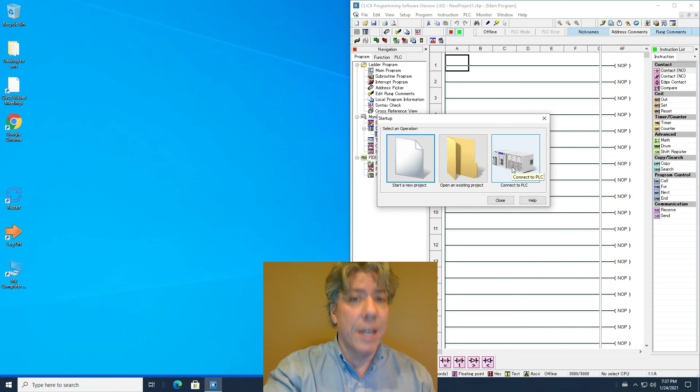Now, in a lot of the demonstration videos, you'll see people start a new project and then select the PLC they're working with. If you just connect to the PLC, then it will detect what kind it is. Now, there's actually a couple of different PLCs. There will be PLCs that you are working with, and those are connected via USB. You'll see a little cable that runs from the PLC, and there's a little blue box that converts it from serial to USB. USB is also technically serial, but to a standard serial port.

Anyway, so you'll plug it in. The easiest place to do that is just right on the front of the computer. You can reach around and plug it in the back if you really want to, but in my experience, the front ports work just fine. If it can't detect the PLC, try moving to a different USB port, and it should work.

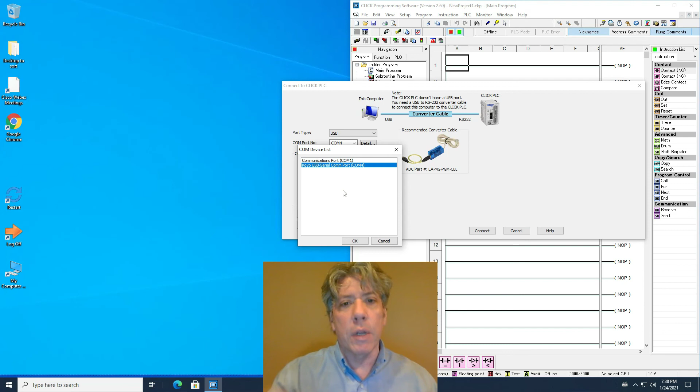Anyway, when you hit USB, it'll come up with a COM port number. I always hit detail, and then it should show you the Koyo USB serial COM port. Whichever one that is, it doesn't matter what the COM port number is. It can be COM1, COM4, COM20 for all I care. If it has that note right there, Koyo USB serial COM port, that's the one you want. So hit OK. It happens to be that that was COM4.

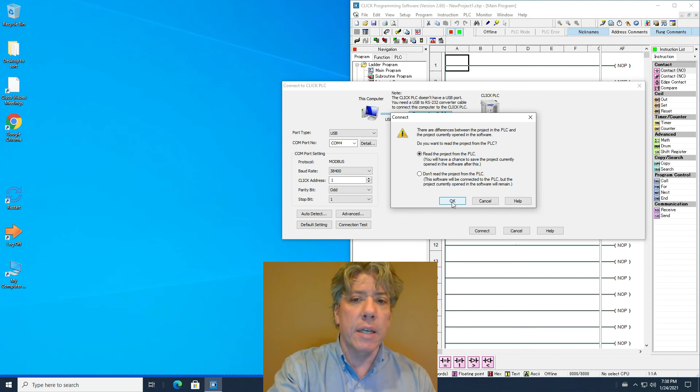And then I don't mess with the auto detect or anything. At this point, if it has that Click Koyo USB as an option in the COM list, then it should work just fine. So I have an option here. I can either read the program that's in the PLC or don't. I'm going to go ahead and read the program that's in the PLC so you can get an idea of what the programs kind of look like. But then I'm going to make my own program, and I'll show you how we use these and how they work. So right now it's just pulling all the data from the PLC.

Let's see, project has been saved with an earlier version of Click Programming Software. So the program that's on the PLC was written with an earlier version of this software. Do I want to save?

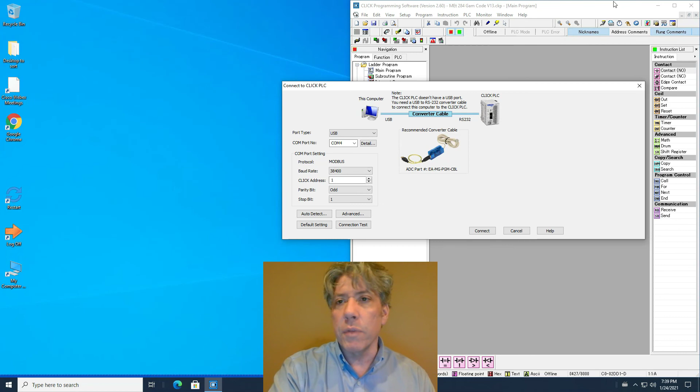It doesn't matter. This is some student project from the past. That grade's long been submitted, probably last year. Yeah, this is one of last year's projects.

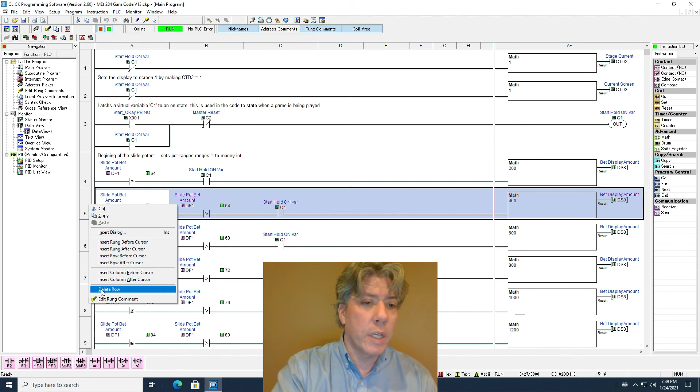I recognize it. So anyway, this is a PLC program, and I've made it full screen. I've posted some videos where you can see some other items and information, kind of the overview. But I want to show you a little more detail. There's a lot here. I don't really want it all. You can't, unfortunately, select a bunch of rungs at once. I just held down the shift button. You've got to delete them one at a time as far as I can tell, but if I click on this and I hit D, no, that didn't work. That's alright. We'll just delete all of these rows.

I could hit new, but if I hit new, it will make me choose the type of PLC. By the way, one thing you should know about is under Setup, System Configuration. I think there is an icon for this somewhere up here. I can never find it. That's syntax check. So I always just go up to Setup and then System Configuration.

There are differences between the configuration on the PLC and the PC. What this means is that this program that's been brought up thinks that it's working with a certain PLC that has certain input-output cards. But the real PLC, the one that I'm literally connected to right now in the lab, is a different configuration. So I have a choice. If I say yes, use the system configuration in the PLC, which I'm connected to online, or use the system configuration of the PC. In other words, do you want me to go out to the PLC and see what it actually has and use that?

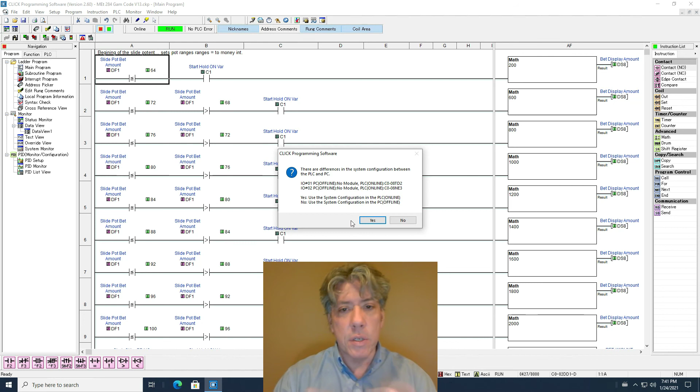Or are you programming on a PLC where you know it's just temporary and you're actually going to put it on some other PLC that has a different configuration? Well, in this case, I want it to actually go out and say, okay, what do I have that's there? What PLC is this? What I/O modules does it have? What are their address ranges? All those things. So the option I would choose is yes. That way it'll go to the real PLC and find out what all it has.

And my whole reason for doing this was to show you this screen and show you how nice it is. It's a really convenient area. So it's just telling me that I can edit the power supply. It can't detect what power supply it's being given. It's just a 24-volt supply. But I wanted to show you this because it's really nice.

It goes out and it detects which PLC is being used. So there's the model number, so you can look up the data sheet on it. And it tells you all the modules that are connected. If you were looking at this PLC, this is what it would look like, except of course you'd be able to see the power supply as well. Now, it's not easy to see this. You'd have to zoom in a little bit, I guess.

You can connect to it also the way I'm doing. I'm actually at home using the lab remote stuff that I posted you information for. If you can't find that, let me know. I'll tell you where it's at. It's in the laboratory information area.

But I really like this because it shows you what are all the inputs and all the outputs associated with each one of the items. Now, one thing I don't like, they don't line up. So the CPU is actually over here, the IO1 is here, IO2 is here. I wish they expanded the tabs so it was just beneath, but small human factors thing.

So the PLC itself has several different inputs. They are X001 through X004. Those are on-off discrete type inputs, so we'd wire up switches to those. And we only have 4 inputs on the PLC itself. Technically we have 2 more inputs, but those other 2 inputs are analog inputs, and they come in to the PLC in a different address range.

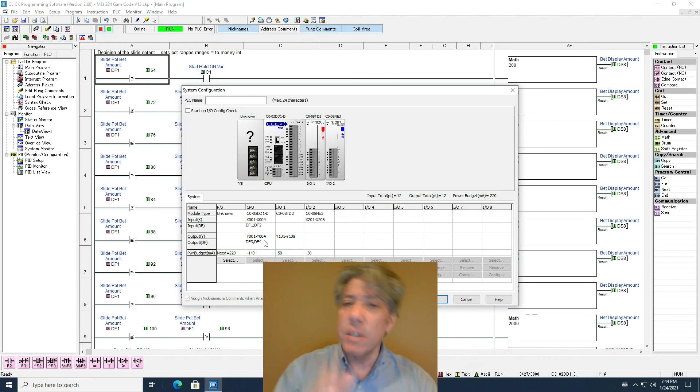It doesn't really matter. The outputs that the CPU itself has, well, there are 4. They are Y1 through Y4. Now notice it's Y001 and Y004. And the reason for that is because you're likely to have a whole lot of discrete or on-off binary types of inputs and outputs. And you aren't likely to have very many analog inputs and outputs, at least for this class. And even in the real world, a lot of systems run with just discrete I/O. But you may need some.

So the other addresses for other modules, sometimes you can assign them if they're analog addresses. Sometimes you can select and arrange. The discrete addresses, though, are automatically assigned essentially by module number. So you'll notice while we have Y001 through Y004, we have Y101 through Y108 for the next module, which is an output module. It's a Y, so it has to be an output, right? So there's an output module as the first expansion module on the side of the PLC, and then there's an input module daisy-chained off of the output module.

And it provides X201 through X208. Notice that the number right after the X or the Y indicates the module position. So that's nice to know, but not necessary. You can always go in here and look. But we've got 8 inputs on this last card.

We've got 8 outputs on the IO1, and the PLC itself has 4 inputs, 4 outputs. So that's a total of 12 inputs and 12 outputs as far as discrete inputs and outputs go. So not only do we have the analog inputs on DF1 and DF2, but we have analog outputs on DF3 and DF4.

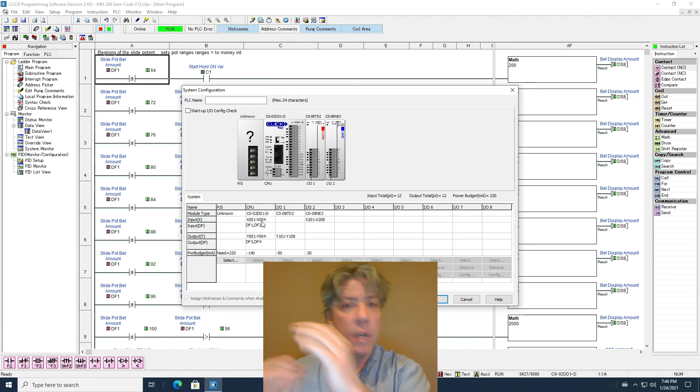Now, let me show you the memory in the PLC, and you'll notice that the X's are in their own area. The inputs are in their own area. The outputs, Y's, are in their own area, even if they're on a different module. But the DFs, whether they're input or output, they're all in one memory table. So let me show you where that's at. I'm just going to hit OK here.

So if I just click on one of these addresses here and I say I want to change it, it's a bit memory address, I'm just changing what address this particular instruction is referencing. Click the 3 dots. You'll notice I can choose from the X's, which are all inputs, and notice it's set up very nicely where we have X001 range, X101 range, and X201 range, and so on. I'm going to choose the X001 range. You notice there's no X000.

One of the interesting things about Click PLCs that is not usual is that they don't start counting from 0. Now, technically the memory still does because computers by default count from 0. 0 is a valid number. But I guess to avoid confusion, they started all the inputs at input 1 and so forth, so you don't have an input 0, and all the outputs as well. That causes a little bit of trouble later for us, but it's not difficult to figure out what to do. But this is one unique feature of the Click series, is that it starts at 1 instead of 0.

So if we were interested in the modules on, let's see, that second one was all outputs, right? So there wouldn't be any X's. Like if I looked at X10 range, there's nothing there. You notice that it only goes X101 through X116, and then the X2 series begins. Now I could just click X201 and it would just scroll down to that. Or I can just grab this bar and scroll down. It's easy enough. But this would be the inputs on that very last expansion module.

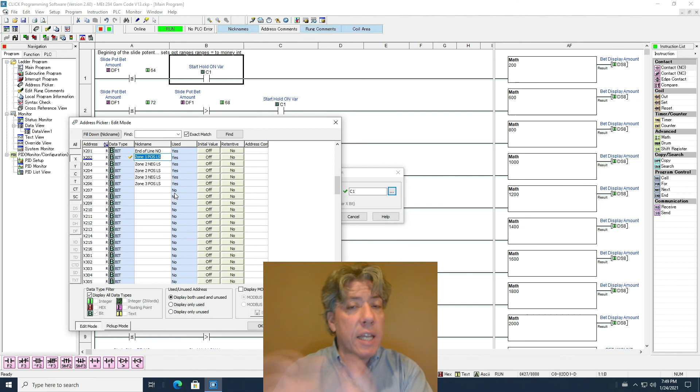And limit switch, having that in your program doesn't really add a lot of detail. I mean, you can if you want. I prefer to have normally open or normally closed so that later on when I'm programming I can use it. It's a little more beneficial in my opinion.

So right now I'm in edit mode, and I could go to pickup mode, which is where I'm actually choosing the address that will go into this instruction. If I hit OK, for example, I had X202 highlighted, so it puts it in. If I hit OK, then that becomes the address that this instruction is referencing. So basically what this instruction does is it allows power to pass if, for one thing, power is coming in.

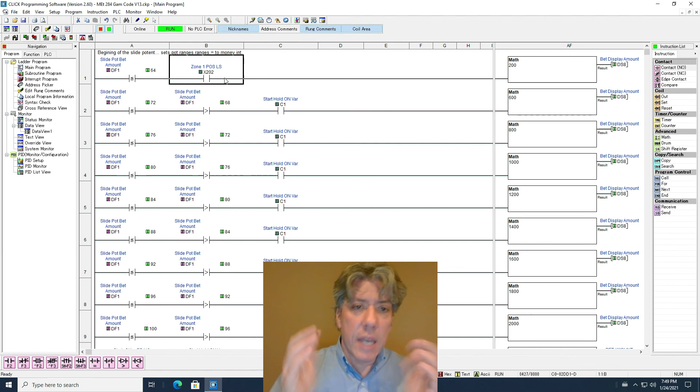The previous instruction has to give power to it. But it also only allows power to pass if X202 is true. Okay, so X202 is a memory address that's either true or false. Now, the switch attached to that particular input, what would that be?

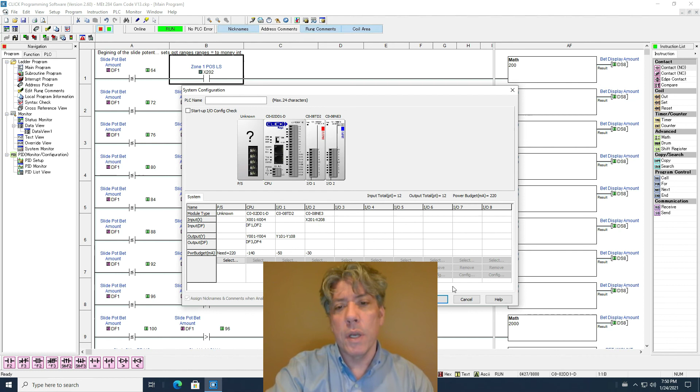Well, if we go to Setup, System Configuration, can't point to the real PLC because I don't have it here, but X202 would be this last module. It would be the second input point on that module. And it's labeled 2. So it'd actually be the third terminal, because I've forgotten what the first terminal's labeled. It's a common or something. But the third terminal down is the second input point. And so that's where the switch would be physically wired that then drives this memory address X202.

I can't turn on or off X202 in this program. It's driven by an external switch, right? That's what determines the status of that memory address. Now I can override it. I can force it. I can pretend that it's on. But I do that in software. I don't do that in PLC programming. So as far as I know, there are no force commands in PLC programming. But there are force commands in this software where you can simulate a particular input coming on, and you can simulate outputs turning on and so forth.

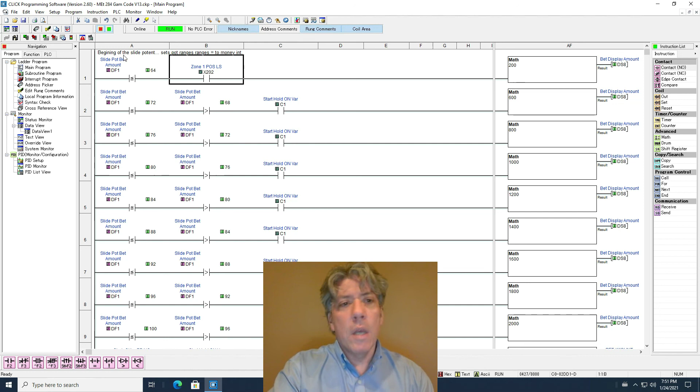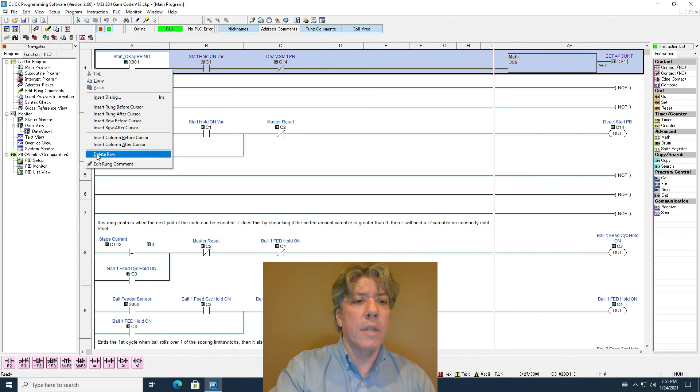So let's make a very simple program. Let's get rid of all of this stuff. They're usually not very long programs. As a matter of fact, I've posted several videos of student projects in the past, and while you can't see the code, and I don't think I actually have the code or I would post it alongside, I will tell you that the first project in the class has less code requirement than the second. And it's pretty common to have a program that's 20 lines or so for the first project, and maybe 50 to 100 lines at the most for the second project.

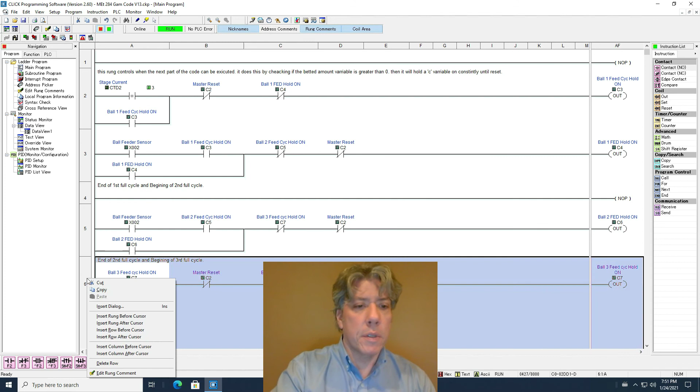This will all disappear pretty quickly, believe it or not. How far does this thing go? It might be quicker to just make a new one. How far does it go? Yeah, I'm gonna make a new one. This one's longer than I remembered. I'd have a lot of time deleting. If I could just select everything and delete it, I would. But let's see, they don't have a way to do that. So I'll have to give up.

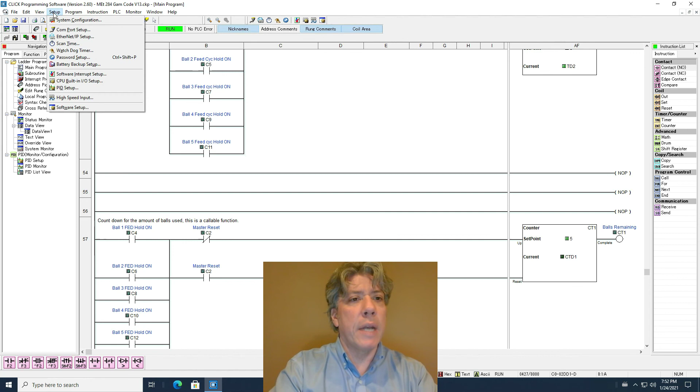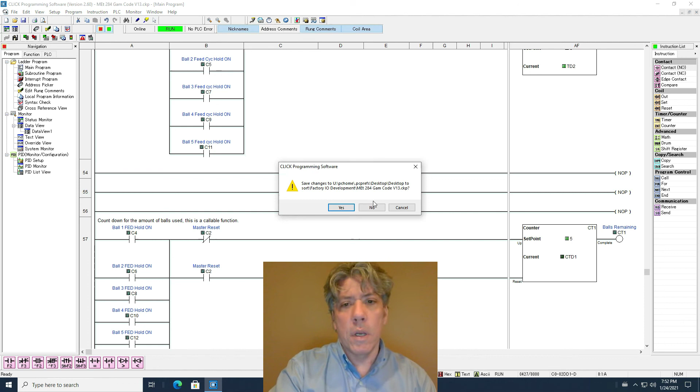I'll have to say new file, but I want to make sure I get the correct PLC. This is an 02DD1-D. Okay, I can remember that, I think. So new. No, I have no desire to save that. Start a new one. So that was an 02DD1-D? There, right there. So I'll select that one. It gives you some good information here about what inputs and outputs it has, which you've already seen. It tells you the output type, which is DC sinking. I'll explain what sinking and sourcing is later. Right now it doesn't matter too much.

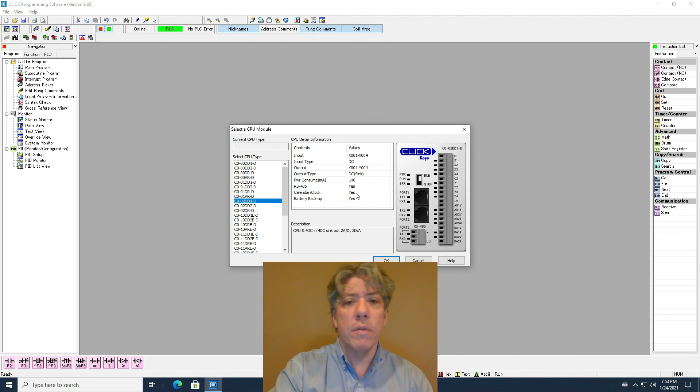Power consumption, 140 milliamps. That's important for your power budget. The power supply you have driving the PLC needs enough for that PLC as well as however many modules you have. So I need at least 140 milliamps coming out of my 24 volt power supply, which I have. I think I spec'd 1.2 amp for these. Anyway, so now we've got a blank program, and I just wanted to write a very simple program for you.

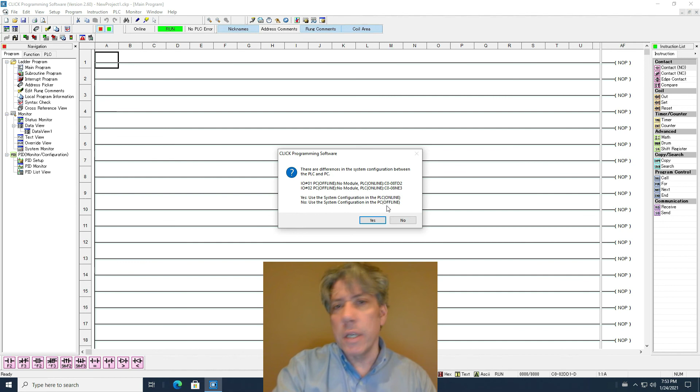What if we wanted to make a switch turn on a lamp? Well, we would need an input. So we'd have to wire up a switch to one of the inputs. And let me get out of this. Actually, if I go to Setup, System Configuration, yes, it needs to detect again what the PLC really is and what all's in it. So I'll say yes.

And it's talking about power budget here, saying you've got to make sure you've got enough power to supply all of the modules. It doesn't know what power supply you've got, so you need to check and make sure you've got enough power. I know I have. So we're back where we were. It's still the same PLC we're connected to, right? But I could choose to wire up an input to any one of those 4 inputs on the CPU module, or I could wire up an input to module 2, which is out at the end.

It's kind of interesting they start from 1 with all of the input addresses, and yet technically the CPU is module 0, because you notice the module number really is that number right after the letter. But like I said, this is kind of unusual that the inputs and outputs don't begin at input or output 0, but it's a small thing. You get used to it.

So I could either wire up inputs to the CPU or to this one. I cannot wire up an input switch to the output module. An output module only provides output. It can't take input. So that's something that's pretty important. So I have to choose an address that is from X001 to X004 or X201 through X208. And then I would have to wire up my switch to that particular point. And then I could reference that switch. And the way I would reference it is with the address that I wire to.

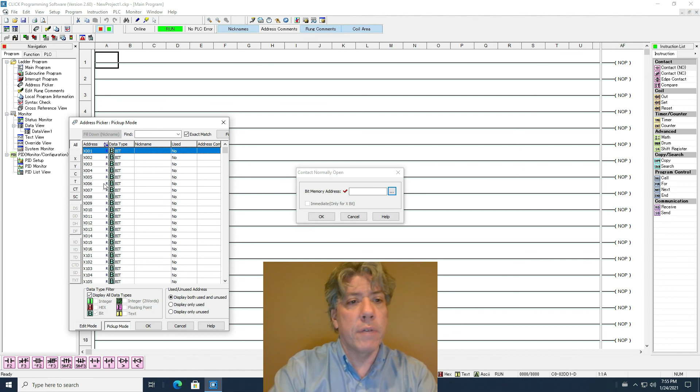Let me go into the address picker. You can just type in the number. I could have typed just X001 if I wanted, but I wanted to give it a name, so I'm going to hit edit mode, and I'm going to name it, I don't know, light on, and I'll call it a normally open, so NO switch. Go to pickup mode, that one's selected, hit OK, and so X001 is there. Now notice that it gives me the name here.

It's really important that when you choose an address and you wire up a switch to it, that you give that point a name. It makes your programming a whole lot easier to understand. It makes it easier to write. It makes it easier to troubleshoot. Trust me, you desperately need to put names on everything that you're going to use. It will save you in the long run. Okay, just start out doing it, and I will take off points for programs that I see where you have not labeled the inputs and outputs that you are using. It's very important. And I also highly recommend that you put rung comments on your rungs.

In fact, the way you do that, let's see, edit rung comment. You just right click on the rung anywhere. I don't know if you can right click. Yeah, you can. You can right click on the rung number and hit edit rung comment, and then you can just name it. So this rung turns on the light. Okay. And then there's a little comment there that you can read, and you see what that rung is supposed to do. Or maybe this rung and the next 3 turn on the light. Whatever it is, it's just comments.

If you've ever, well, all of you should have programmed by now. So any programming language you write in, the teacher always tries to get you to comment your code. And I know that because I've programmed in so many different languages. I know what a pain it is when you don't comment your code.

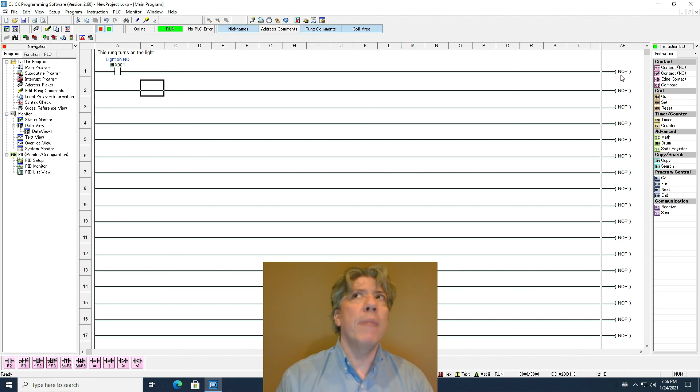So what I've done now is I've dragged an output to the end of the rung to be turned on. So this would be where I'm going to wire up the light. So let's choose an address, and notice that we can't choose any of the X's. Did you notice when I was working with the instruction that was an input to turn the light on, I actually could choose outputs there. I'll show you how we would use that in just a second. But notice that right now I can't force an input on by referring to the address of an input.

I can only turn outputs on or affect memory addresses. That's what these control relay or C addresses are. They're just bit memory. And then there are system control relays, but we'll talk about all of that later. Right now, let's just grab an output. I'll just choose Y001, but I'm going to name it.

So let's call this green lamp. And then pickup mode. I'm just making all this up as we go. And there's some options here, one shot and immediate. I'll tell you what all that means later. Don't worry about it right now. We'll just hit OK. So now we have selected the green lamp as the output.

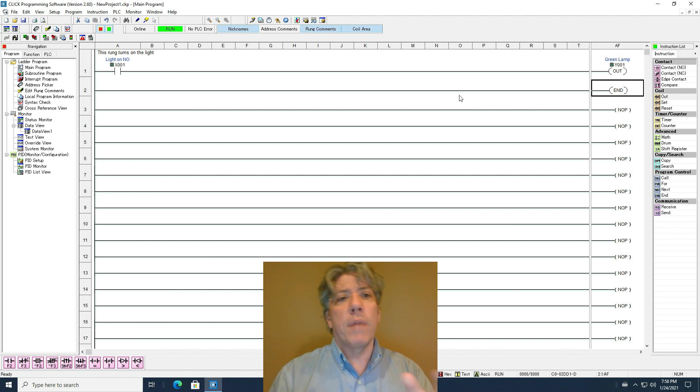And if you need more space, you can actually just drag right over this, put something else there. I'm going to cancel, I won't do that yet. I will in a minute. So anyway, if we were to download and run this program on the PLC right now, any switch connected to input 1, which there would only be one, you can't connect multiple switches to one input. A switch could be closed. If it was normally open, it could be closed, and when it was, then this instruction would pass power and output a true value or turn on the output on Y001.

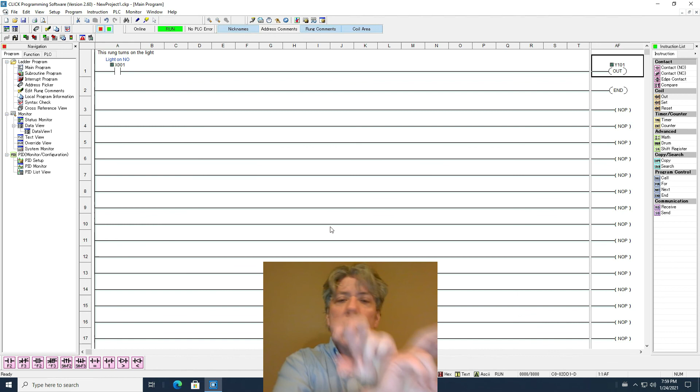So this is all on the CPU module because these are both 0 addresses, right? X0, Y0. They're both on the CPU. I don't have to do that. I could wire up my lamp. Say I want to wire it up to module 1, right? Because remember, module 1 was an output module. Now obviously, if I take those two output modules, which are just daisy-chained on the end of the CPU, I take them off and I flip them around and put them back on so that now instead of having CPU output input, if I instead had CPU input output, all my addresses would be messed up.

And I'll show you something you should do later in the course. It's called mapping input outputs. I'll show you that later when it's more relevant. But it'll save your program when you go and change things around, change the physical wiring a little bit. Mapped I/O can be very useful for future changes and things. It gives you some degree of flexibility as well, and will help avoid problems when there are wiring changes. Anyway, so when I press this button, that lamp will come on.

Notice I've broken a rule here. Can you think of what rule I broke? I didn't name this. How did I end up not naming it? Oh, that's right. I was going to use address Y001, which I did name, and then I changed the address, didn't I? So I forgot to change this. So now let's go to Y101, and let's call it green lamp. This name already exists, it's assigned, so it won't let me. So I've actually got to delete this one first.

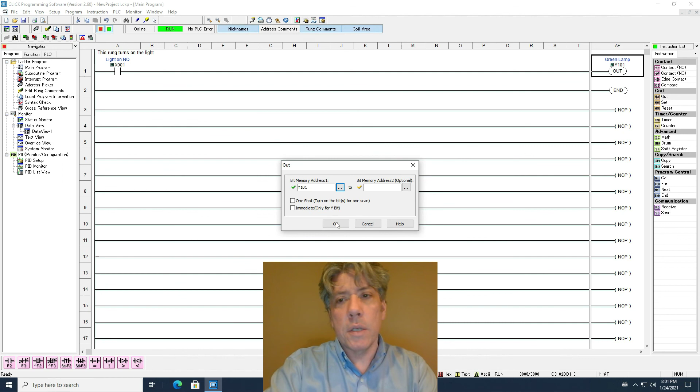Then I can go, so it won't let you name anything the same as something already, which I think is good and bad. I can see both sides. So anyway, there we go. Green lamp, pickup mode. I will choose that one. Okay, it did change. And now you can see it's named properly.

Alright, now let's just say that anytime this green lamp comes on, something else needs to also come on. I don't have to reference this address. Because I have this address being turned on, I can actually reference this address. So let's just pretend that whenever the green lamp comes on, a motor should start. Okay, so I'm going to drag an output over here. I'll grab another address, and we'll just continue with our pretending that there's a motor connected to Y102. Okay, so we'll call this motor, for lack of a more creative term. Okay, so Y102 is the motor.

If I, for some reason, do not want to reference this particular address, I don't have to. Because Y101 comes on, I can reference that address. So what I'm trying to say here is that output addresses can be used as conditions. Everything between the numbers here and this vertical bar after cell or column T, all of that, those are considered conditional things. They're the logic that determines what the output should be.

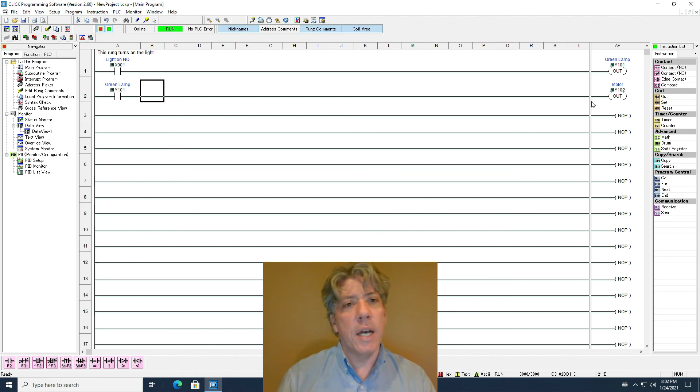So all the PLC really does as it scans, besides all the overhead stuff, when it's running the program, what that really means is that line by line it evaluates the statements and decides whether the output should be triggered or not. That's all it really does. And don't think that that's a weak thing. You can make some very complicated programs with just that functionality, and I'll show you some as we go along.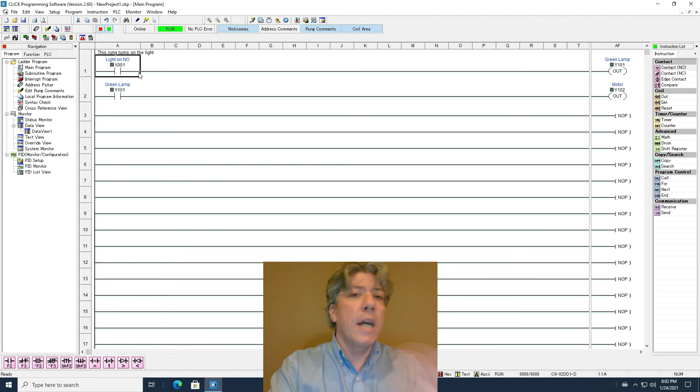But a lot of times what will happen is that the conditions for a particular output will be pretty complicated. It won't just be this. You'll have a bunch of other instructions, you'll have some branches, you'll have some other things in there, and it's a big pain to just copy that and put it on another line where you want the same condition. So rather what you do is you simply use the output that's already been calculated and use that to drive another output that is supposed to be identical.

I actually use this in kind of an interesting way in my boiler heat setup. I've got a set and reset output. These outputs that I'm showing you right now that just say out, they can turn an output on or off. But set and reset, on the other hand, are... I'm just going to give it some addresses really quick here, and I will name it in just a moment. Set and reset are the latch and unlatch, basically. So set is like latch, reset is unlatch.

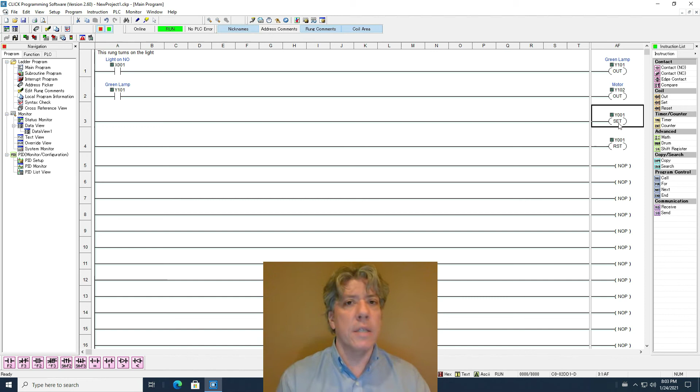And sometimes what you want to do is just have an output instruction that can only turn on the particular memory address. So in my heating system, I've got two different valves, and the valves should basically just always be opposites of one another. If one's open, the other one should be closed, and vice versa. It's that simple. So I have an output instruction that controls one of the valves, let's say kind of like this motor here, and what I've got is conditions.

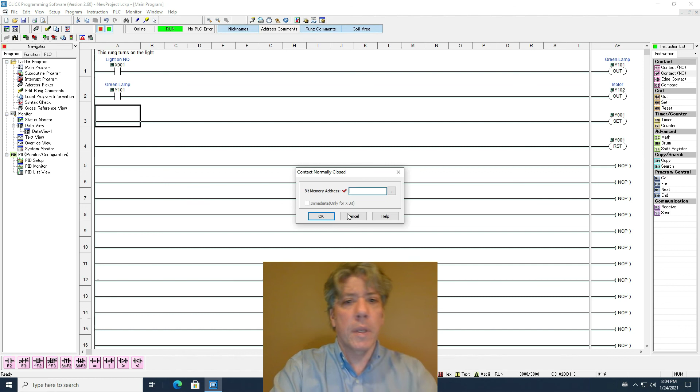The conditions for turning one on and the other one off are a little bit different, but basically I invert the output. So for example, I might invert Y102, and that's what determines that Y001 should come on. When this turns off, this one should come on. And what is it? Well, I should name it, but I'm just illustrating the idea here. So I can name this valve 1, and this one would be valve 1 as well.

And usually when you have a set, you also have a reset, and they reference the same addresses, because if you don't have the two, you can't turn it both on and off, because like I said, this instruction can only turn on address Y001. This one can only turn it off. So if you ever want the output to go off after it's come on, well then this is the way you do it. Now why would you ever do this when this instruction can do both? It can turn on and off.

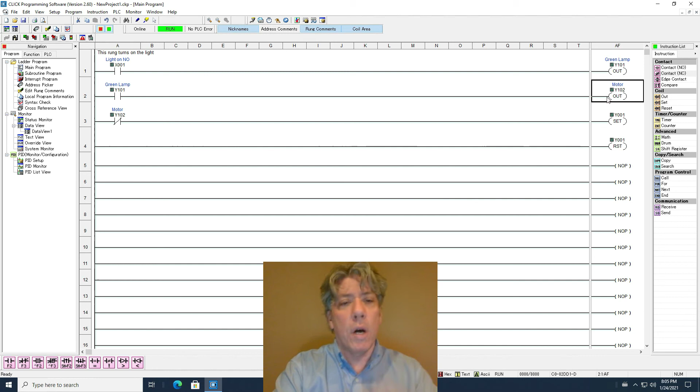Well, by default, there's no way to change this that I know of where this instruction isn't a simple inverse of all the conditions on the rung before it for the opposite case. What do I mean? Well, for Y101 to come on, X001 has to come on. If X001 is off, then Y101 is off. So the conditions for turning Y101 on are just the opposite from the conditions of turning it off.

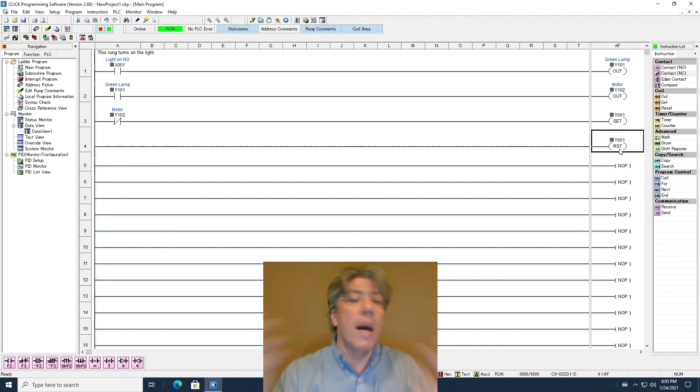The nice thing about having the set and reset is you don't have to have exactly opposite conditions for turning it on in one case and turning it off in the other. Like the condition for turning this on could be that motor turns off, that motor 102 goes off. And let's just pretend this is a valve.

Let me name it. That's bothering me. I gotta name it. Hang on. So we'll name this in edit mode. We'll just call it a valve. We'll pretend it's a valve in my heating system. Okay, that should pick it up. There we go. Okay, so now it's got a name. So the valve, it's supposed to be V-A-L-V-E. Oh well, you get the idea.

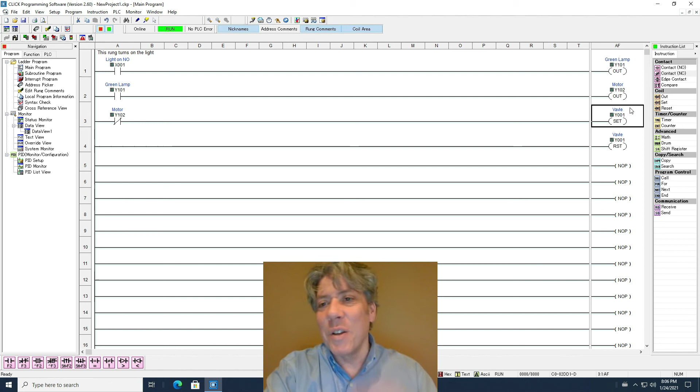So the valve will only turn on when the motor turns off. But what if I have some other conditions? What if I don't want just the opposite here? What if I want X101 here? Okay, so we'll go and name that real quick. Let's just pretend it's some other input in the system.

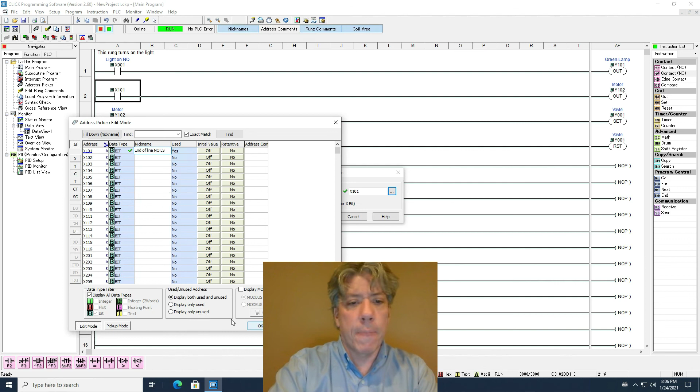Maybe this is a limit switch. Let's see, end of line, normally open limit switch. Okay. Pickup mode, we'll grab that one, hit OK, that's fine. So notice that the conditions for the green lamp coming on, which is just a switch closing, are different than the motor coming on. That's this end of line.

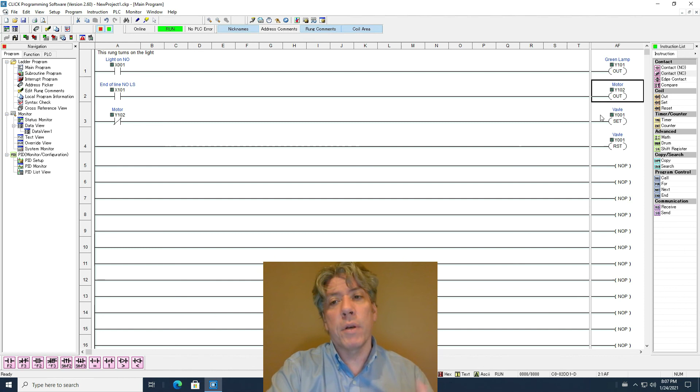What if I want the condition for the valve to go on being that the motor's off, but I want the condition for the valve to turn off to be when the lamp comes on? That's completely different. That's independent of the motor. But maybe for some reason in my program, what I really want is to only turn off the valve when the green lamp goes off, you see. This is the only way I can do it.

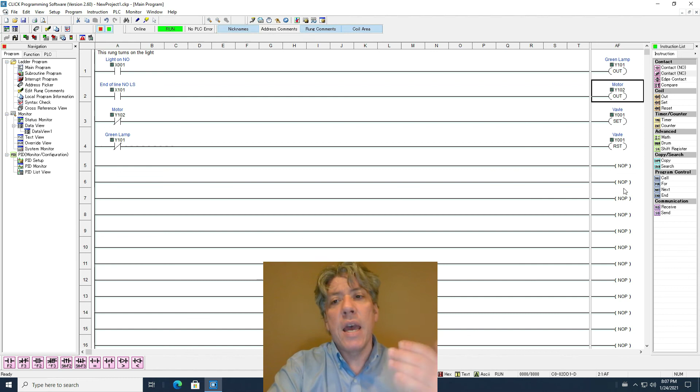I can't control this valve output 001 with the motor itself, or with an output like the motor has, or with an output like the green lamp has. I have to choose the conditions for turning the valve on that are right here that are different than the opposite of that as the conditions for turning it off.

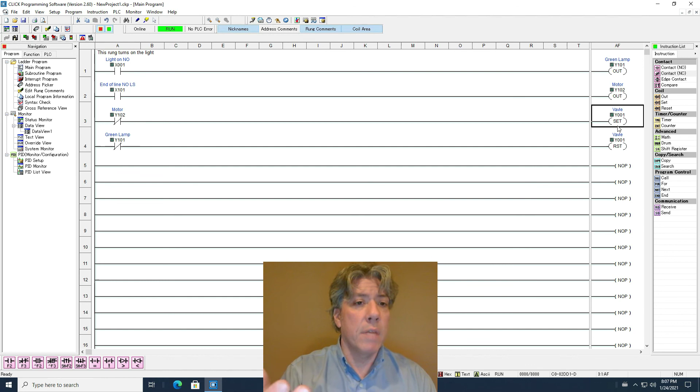Because if I just had an output right here instead of set, then, let's see, we need to inverse it. So anytime the motor turned on, then that would shut the valve off, right? But anytime the motor's off, the valve would come on. They're just opposites of one another. Those aren't the conditions I want. So when the conditions you want for off are different than the opposite of conditions for on, then you have to use set and reset.

And maybe that'll make a little more sense later. But set and reset are very powerful commands. They're very useful. And it takes a little bit of getting used to buttons that, when you push them, they don't stay pushed. You may be a little more familiar with that because buttons on your cell phone are momentary type buttons as well. But light switches, which most people are very familiar with, they think of as turning things on. They usually don't think about a volume button as turning things on, maybe a power button on your smartphone.

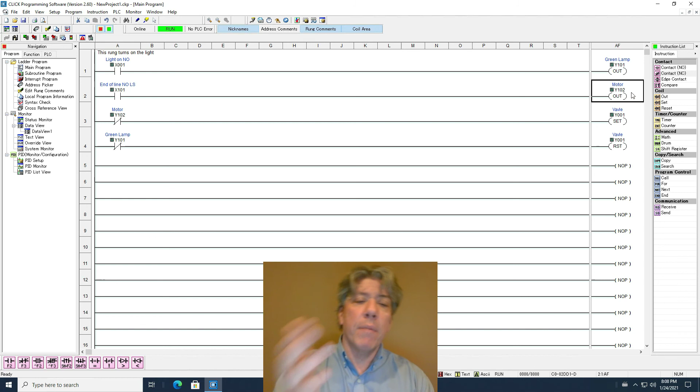But toggle switches kind of get you in the mode of when I flip it into one position, it turns on and it stays on unless I come back and change it. And so students sometimes have a hard time wrapping their heads around switches that are momentary and so go off when you release them, and outputs that can both be turned on and off by a set of conditions.

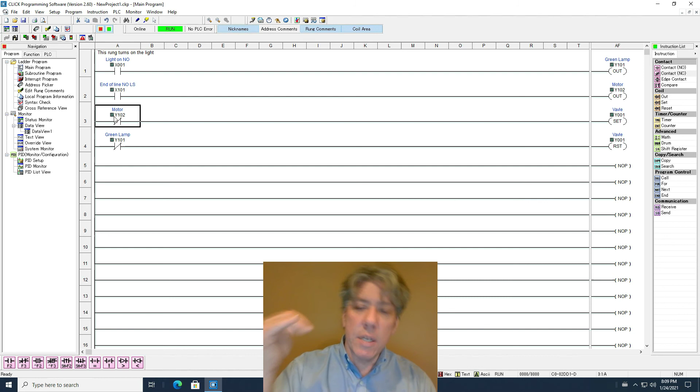They're used to programming also typically, and they're used to when I turn on a variable, it just stays on. And they don't think about that the PLC is going to come back and reevaluate this instruction or this line every single time, maybe every few milliseconds. And so it's possible that it will come back very quickly and turn off that output that I thought was on, or that condition I thought was on.

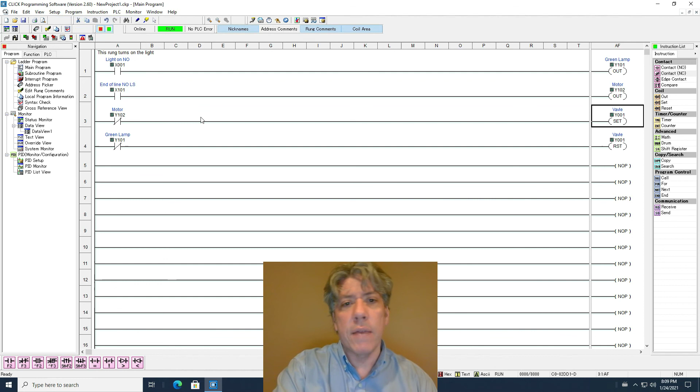So with all that being said, that's just a quick introduction. I haven't actually connected anything to the PLC. I'm connected to it for programming purposes, but I don't have the switch and the light hooked up. And there's a lot of detail with that I'll have to teach you about inputs and outputs, because if I look up this particular model, the way that I connect the inputs and outputs is really important. I have to know what I'm doing with this.

There's this thing called sinking and sourcing, and one of the things that really confuses students is they seem to think that with this output module, if they connect a lamp to it, all they've got to do is take the two wires from the lamp and plug it right into the socket and it'll work. These output modules don't work that way. They don't have power to give to field devices. You have to somehow give power to the module that the module can switch.

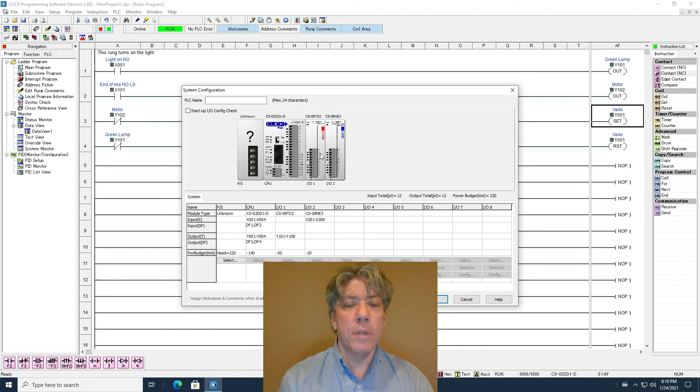So all you're really doing is giving the PLC control over the light switch itself. Okay? But the PLC doesn't have the power to drive that lamp. You have to connect the power wires themselves, and I'll show you how to do all of that when I talk about module wiring. So this is a simple program that does very little, but hopefully you learned a few things from it.